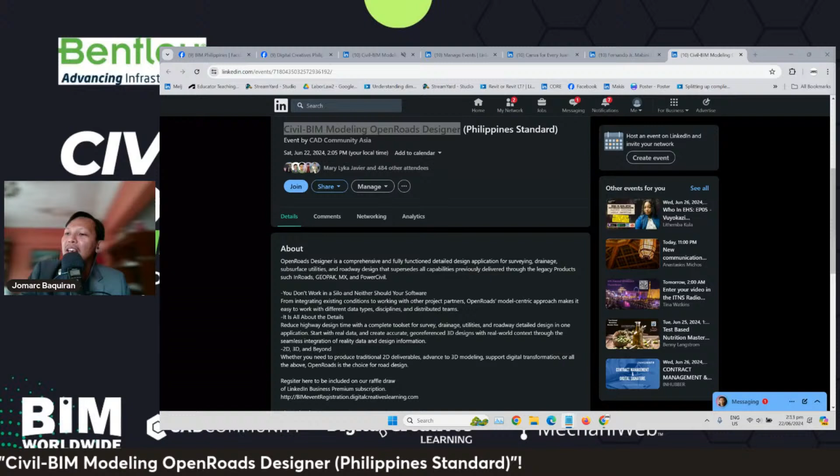Hello, thank you sir. Thank you. Hello everyone, for those who are joining virtually, thank you Sir Jomarc. Thank you for having me. We're live on Twitch, YouTube, LinkedIn, and Facebook.

So for those who are not familiar with Sir Fernando, he's also a Filipino, right? Correct, sir. I'm a native of Samar in the Philippines. And right now, where are you currently located, are you in Samar or somewhere else? I'm based in Singapore, and yeah, I was hired by a local company in 2008, and since then I'm already based in Singapore.

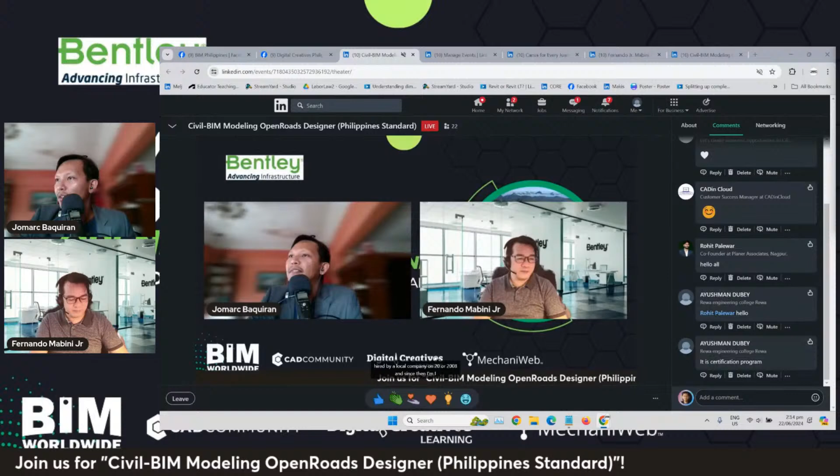Bentley, parang wrong spelling yun na. Bent, Bentley. Yeah. Yeah, to our friends who are tuning in from LinkedIn o sample o like Miss Nelsie o Bentley, Marlene Sally. Ayan. Sir Rohit Palewar. Thank you for joining us. Ayushman Dubey. Ayan. Worldwide tayo nga, sir. Tama nga.

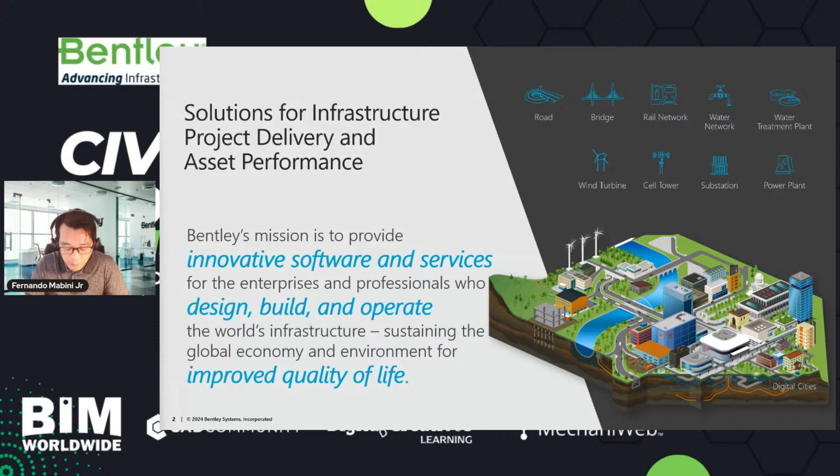But let's start with a little bit of history of BIM, especially in civil BIM. 30 years ago, our industry was living through the digital transformation of CAD, which was taking what we are doing on paper and moving that to the computer. And then there is the next disruption, which is basically from CAD to BIM, or building information modeling.

So now at this moment, our industry is advancing beyond that. We are basically moving from BIM, and for the last couple of years, we at Bentley Systems have been working hard at adding the missing dimensions, such as the dimension of time and the dimension of context. Okay, so let me dive into

Our purpose for today: our topic is about OpenRoads Designer, Philippines standard. So what's inside this standard? Basically, the Philippines data set is composed of different types of engineering principle. What consists of the Philippine standard is the CAD standards, the road standard details, and the design guideline criteria and standards, or DGCS, also known as the green book or blue book, or whatever you want to call it.

Okay, so let's take a look at the CAD standards. What is the CAD standards in the Philippine data set? That means we have CAD levels, or in Autodesk they call it layers, we have color tables, and we are going to standardize this. This is basically on the blessing of the DPWH.

The Philippine Geo Coordinate System is very, very important because we are working with a civil project, so Geo Coordinate System is very important. We have 5 zones in the Philippines, and 4 of them are actually the ones being used: zone number 1, 3, 4, and 5. Zone number 2 we basically don't use, it's in the Philippine Sea.

We have already line styles, lane markings, guardrails, road median, and barriers, and we have cell libraries as well, such as road signages or cell libraries, which include road signages, traffic lane markings, parapet walls, and monuments.

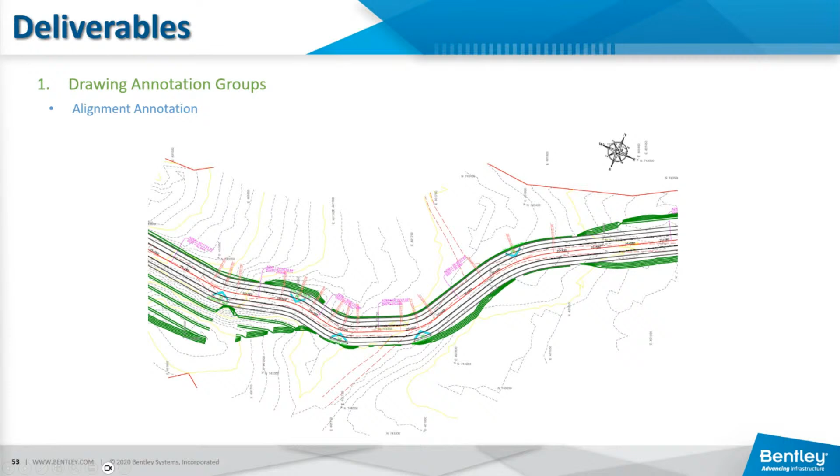In the drawing annotation, on the plan view, we call it annotation groups. We consolidate all those CAD standards and put them into annotation groups, and we apply them to every element you see here in the alignment annotations. Even those contour lines also have those CAD standards, and even the north symbol there is part of the CAD standard as a cell. For the long section profile, the CAD standard of the annotation group is also defined, and for the cross section annotations group it's also defined.

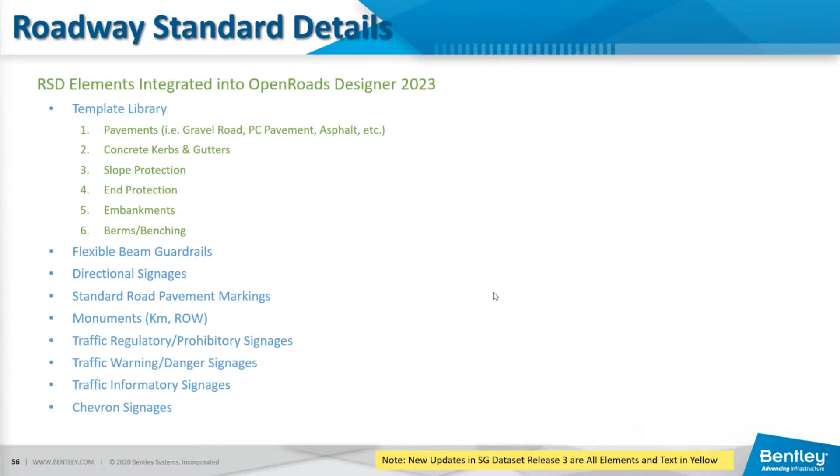Now let's take a look at the roadway standard details. What are those? Basically, those roadway standard details are composed of pavements, the road kerbs, the slope protection, guardrails, signages, pavement markings, the monuments, as mentioned earlier, the traffic regulatory or prohibitory signages, the warning signages, traffic informatory signages, and chevron signages. So those are the roadway standard details.

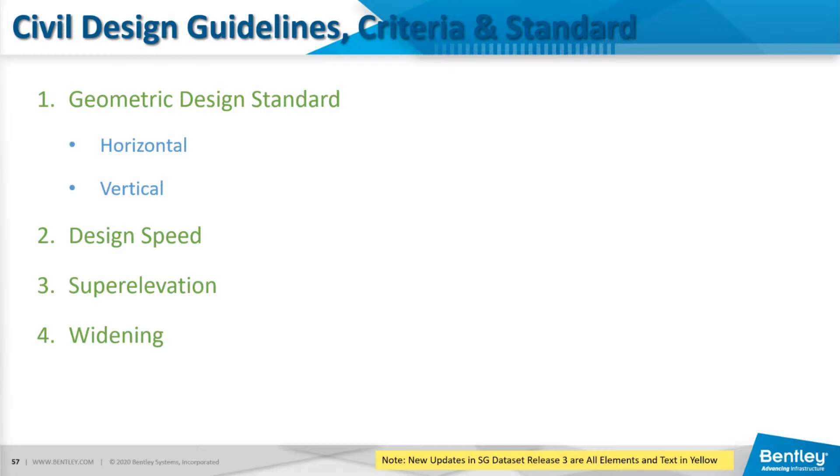And how about the DGCS? That's the engineering principle of the design, connected with the horizontal and vertical alignment. We apply a design speed into it, we apply a super elevation or road widening, so that when we create that in a model, we can determine the speed requirements of your road alignment.

Now what I'm going to show you is we're going to dive into a little bit of technicalities. We're going to create our project, and I'm going to show you the workflow of the project. Let me see here, what is the workflow of the project? Let me show you some slides. Okay, so there you go.

The advantage that OpenRoads has lies in the continuity of the workflow it has from the preliminary to the detailed design stage up to the project delivery, and this is regardless of the data deliverables your project may require. So that means we are going to start with collecting all the data, be it the reality model, the point cloud, or the TopoCAD files.

We are going to collect them. It is very necessary because we are basically creating a digital model, so after that we are going to convert them into a digital terrain model. And if there is geotechnical data, those bore logs or boreholes, we can use our GINT civil tools in OpenRoads to convert them into 3D models.

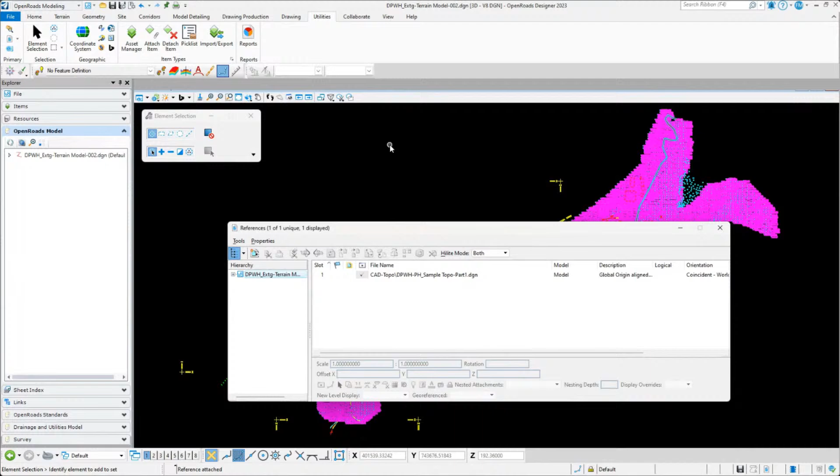For me to be able to create a digital terrain model. So what we have right now is a CAD topo. You can see here, you have those numbers, you have the COGO points right there, or topo points.

And if you rotate the file, you can see that it is basically not really perfect. But what we actually need is only those points right there. We need those points to be able for us to create our terrain model, so we don't need all those things right there in the bottom.

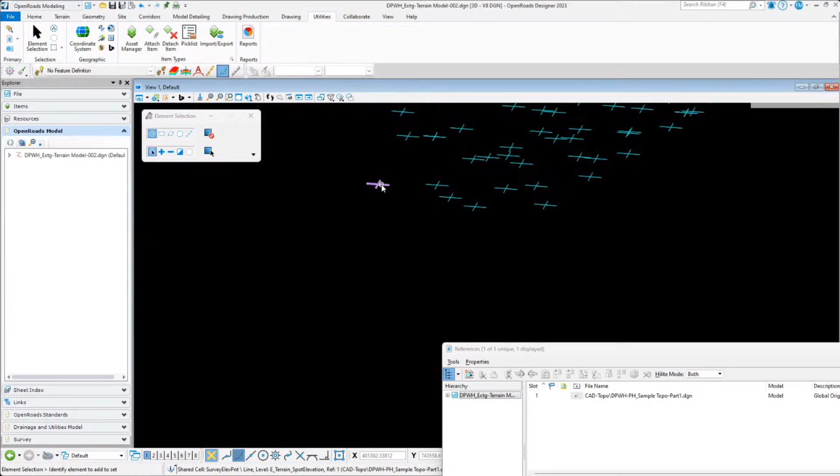So what we need is basically we need to confirm if these points right here are 3D. It has X, Y, Z value. So like so, you can see right here, it has an XYZ value. That means you have the elevation, right?

So what I'm going to do here, I'm going to turn off some elements that I don't need for me to create a terrain model. I'm going to turn off some displays, okay, such as this. So we don't need some elements right there in the bottom.

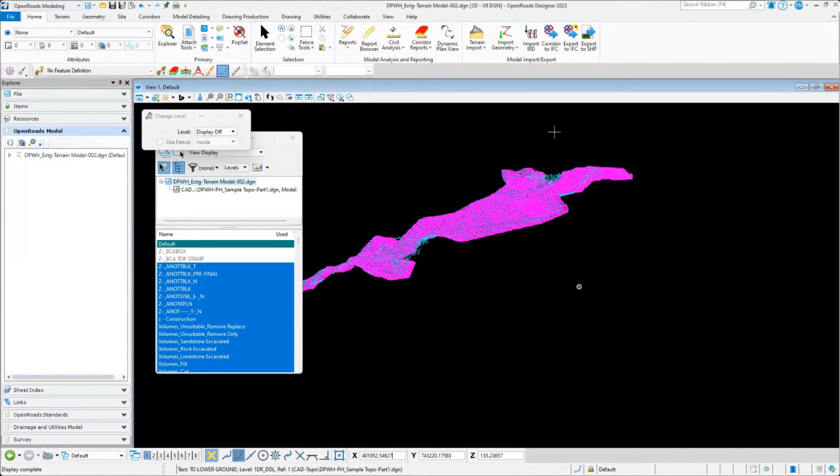So there you go. I don't need these fonts right there. What I need is only the survey points and those break lines that represent the existing roadway. So I'm going to select them all, and then use the terrain tools from the elements.

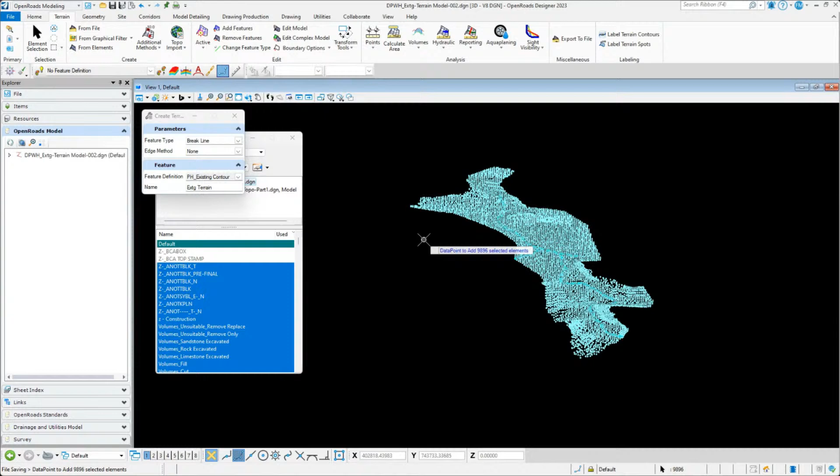I'm going to create a terrain from the elements I've selected. I'll use the Philippine existing contour, and for feature type, I'll go for a break line. Let's name this existing terrain. Left click to accept that, so it will create a terrain. Wait for that to be processed, it won't take a lot of time, maybe less than a minute. It will create you a terrain model.

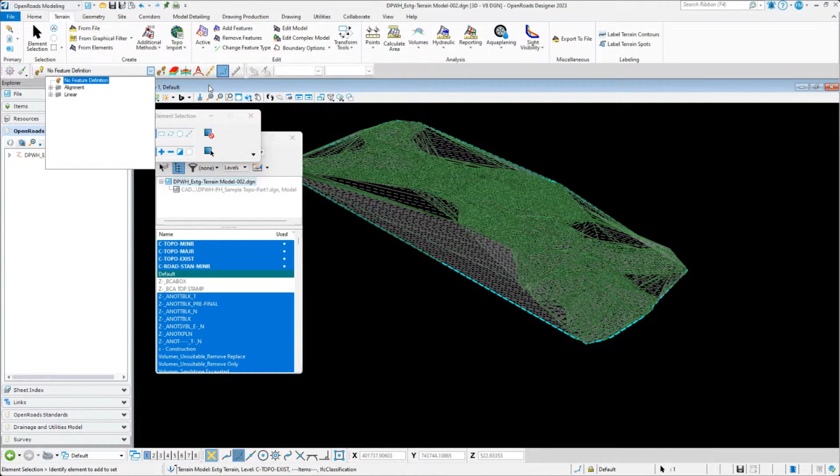All right, so there you go. Now let me just turn off my reference dialog box. So now you have your terrain already. If you take a look right here, let me change the property, open up the triangulations and change the display. I'm gonna change the display into a shaded view. All right, so my terrain is going to look like that.

So if you want to edit the terrain, remove all those triangulations that are not necessary. If you can see here, there are unnecessary triangulations on the edges or on the boundary of your terrain. You can use the edit model tool, select the terrain, and then delete all those triangles that you don't need. So there you go.

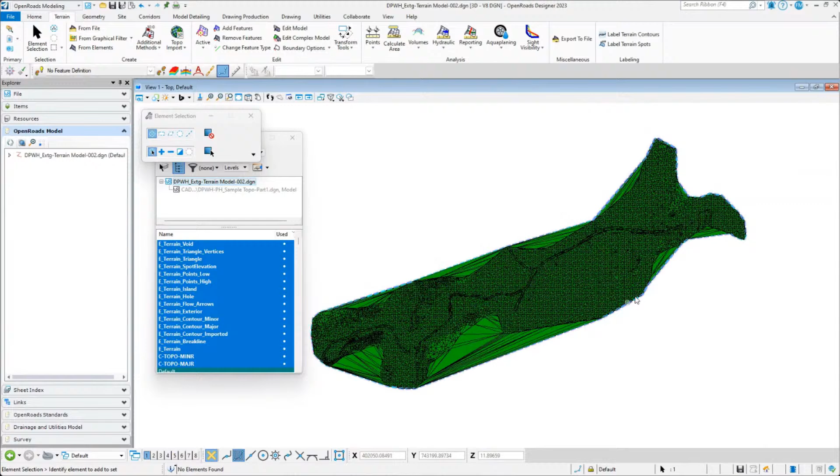So now after cleaning up your terrain, that is basically ready for your alignment creation or your road project creation. You notice that there's a road access right there, an old road maybe, a parent road, so we can be able to trace them and then create a new road using the break line that we selected earlier on.

You can see right here that I can use a feature definition, an alignment specifically for the Philippine standard. This feature definition will hold all those CAD standards, and it can be applied for a Philippine standard design. If you chose that and let it be activated, you can see here that I have the tool called Design Standard Toolbar.

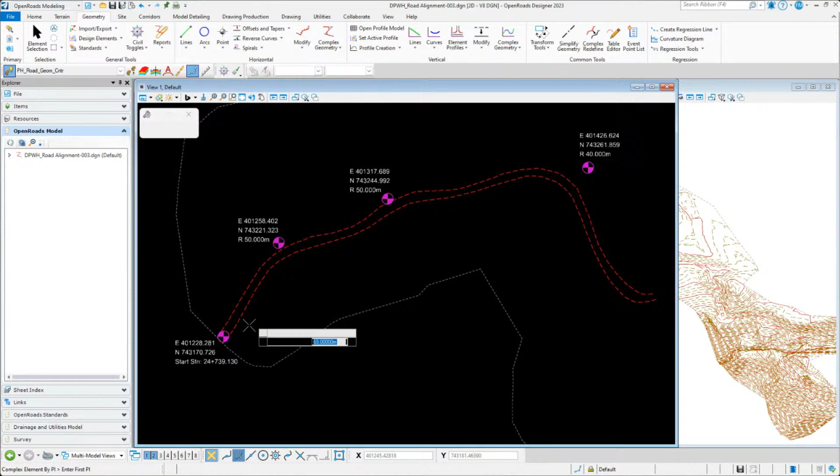So from here, let's say that the road is basically under 6% super elevation. You can choose this, let's say 4% super elevation. You can also choose the speed requirements of the road, but let's not use that for a moment. Let's take a look and create an alignment using all those setting out points that we have.

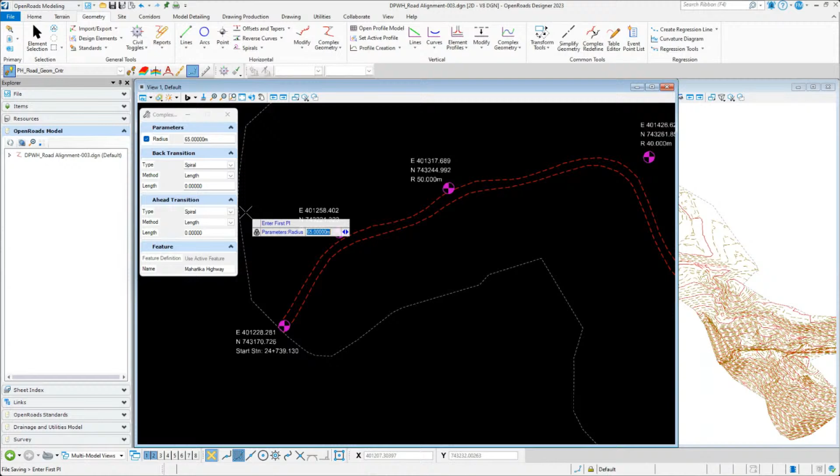Okay, so let's say, for example, this is Maharlika Highway. My radius at this moment is 65, but I can change that later on. So I'm going to pinpoint those setting out points right there.

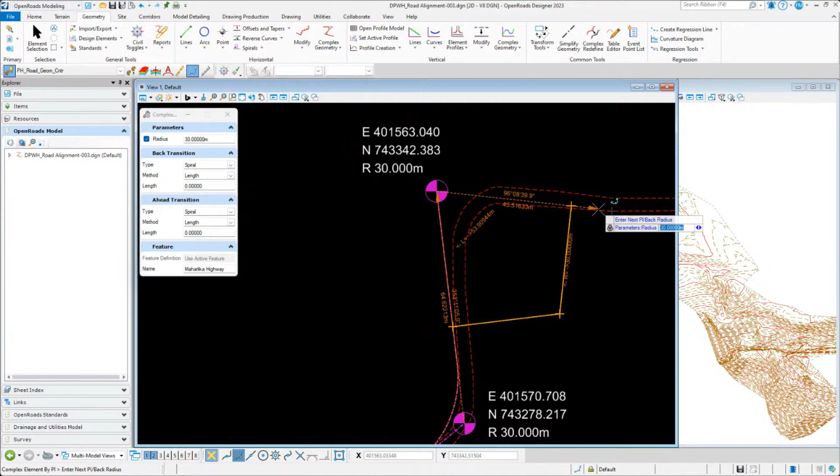So I'm going to change this according to the requirements. It says 50 meters radius, so I'll type that in. This one here is 50 meters radius as well. This one is 40 meters, so I'll just carry on through. This is 30 meters, that is 30 meters as well, 30 meters as well. So 45 meters, I'm gonna just type it in.

So I will just carry on following those parameters, 30 meters. Over here is 35 meters. And this one is 80, 120. Okay, so maybe we'll stop here. All right, so there you go.

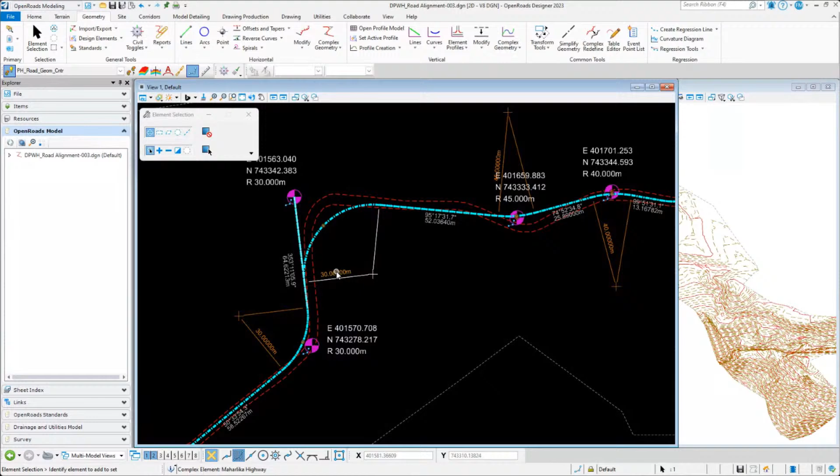Now let me see here, maybe 25, put it back to 30. So sometimes you stumble upon those kind of things. Okay, so now I have an alignment right there. So what I can do with this alignment, remember that this is a 2D environment. You'll see here, I'm in a 2D environment in Bentley Solutions, Civil Solutions. You are going to work in the 2D environment.

So I understand that this is 3D modeling, but this platform is a little bit different. Based on an engineering principle, we are working in the 2D environment.

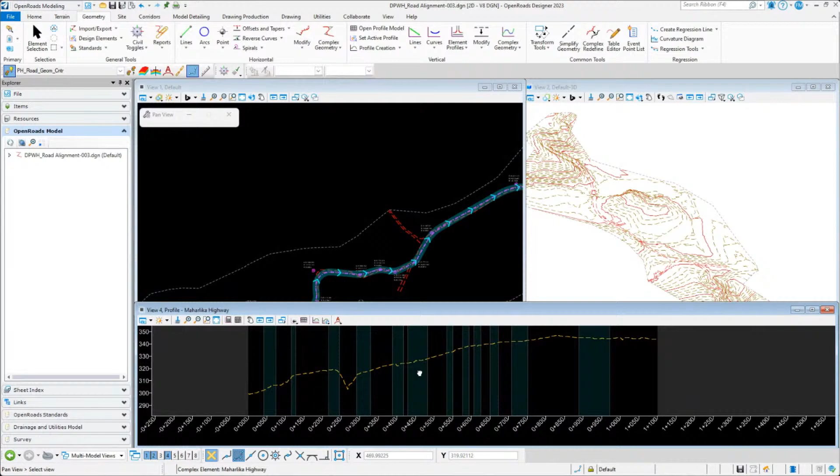After that, I can open up the reference profile, and then you can see I can create a vertical profile right there. I can exaggerate the vertical scale. Most of the time we exaggerate that vertical scale from the view attributes, maybe on a scale of 10 or so.

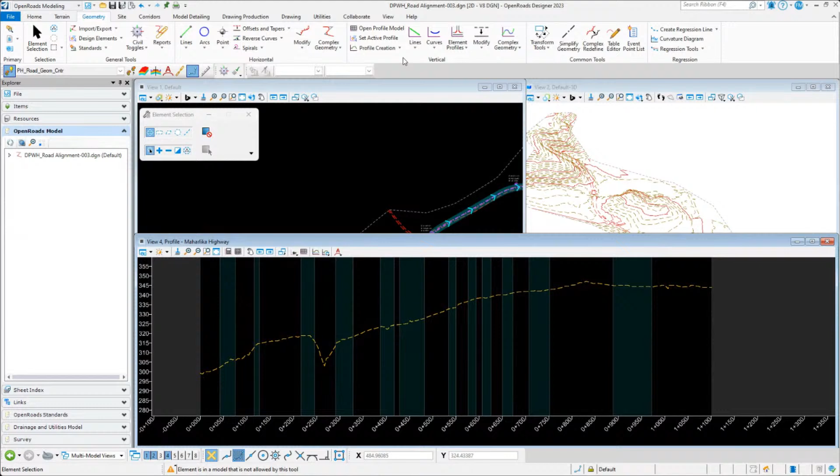Over here we have the vertical tools. We use those. We have different tools for horizontal on the plan view, and vertical tools on the profile view. That is very important.

Over here, I'm going to use the profile complex by VPI. I'm going to arbitrarily create an alignment, like so.

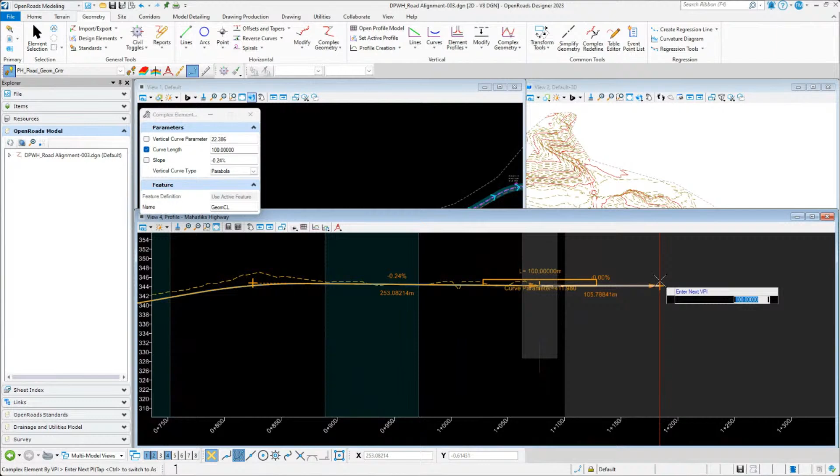So there you go, following through the profile that I already have. So now I have the vertical alignment.

Now watch, take a look right here. The moment I activate this alignment, it's going to create a vertical profile or a 3D model over here. You can see that 3D model of that alignment. That is the only way you can see it in your 3D preview.

Now you can see that all of these elements right here are composed of a Philippine standard, a Philippine CAD standard. When you use this PH road geometry center line, this is the color, the line weights, and the line style of the Philippine CAD standards for road alignment.

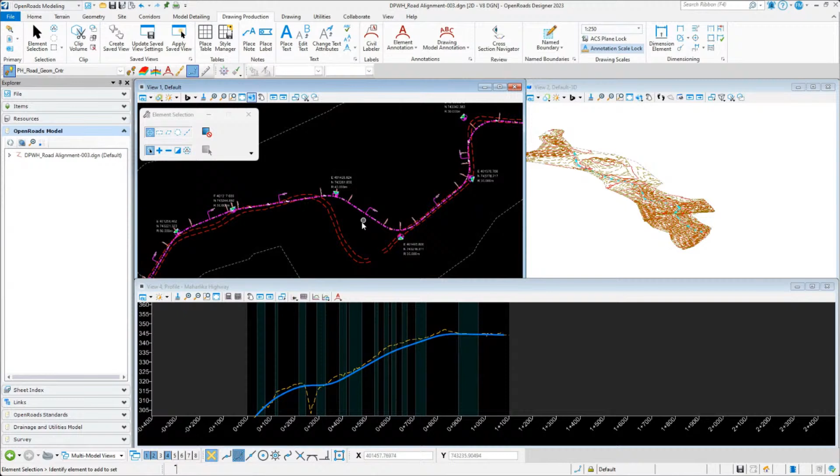Over here, I can place an annotation on that alignment. There you go, you can see all those annotations right there, also based in Philippine standards. Let me just turn off those dark fields.

It's the equivalent software of Autodesk Civil 3D, that is correct. Before, DPWH was using Civil 3D, but they shifted to more logical software such as OpenRoads, or the Bentley platform. So you might need to take note of that.

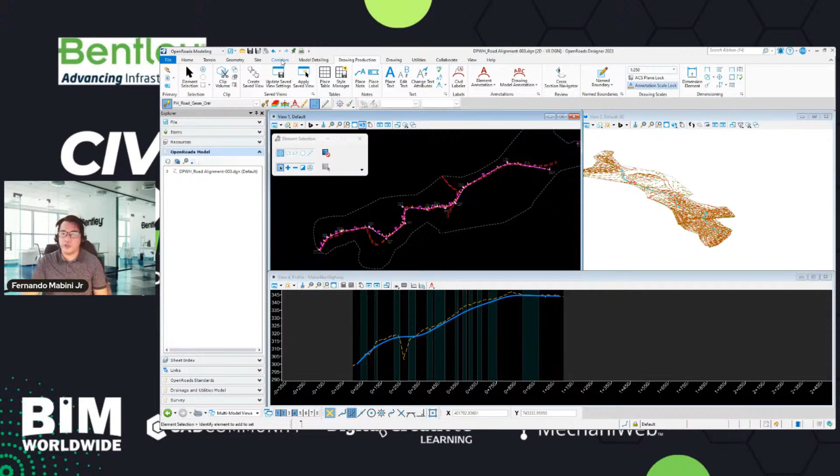Now I can use this alignment already because I already have the vertical profile. I can create a corridor out of that. You can see here I have the templates.

I cannot create a corridor without the template. You can see that I have multiple templates right here, basically based on DPWH projects. You can see here I have the ACP road embankment with berm.

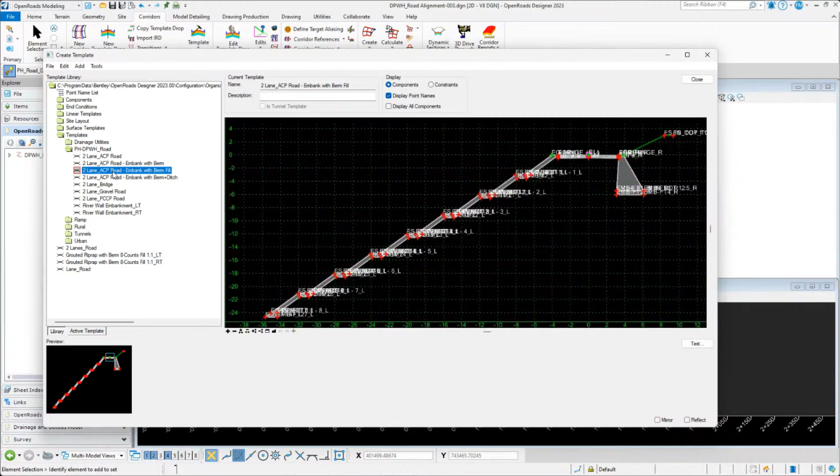Let me look here at the embankment with berm, because this is the most common. I'm going to test, or take a look at the behavior of this template. I'm going to click on test.

That means I can only see the pavement. Now, when the level of the terrain hits any of these elements right here, the berm and the embankment, you can take a look at what's going to happen.

I'm going to draw the level of the terrain. You can see right there, that is the representation of the terrain model, that white horizontal line.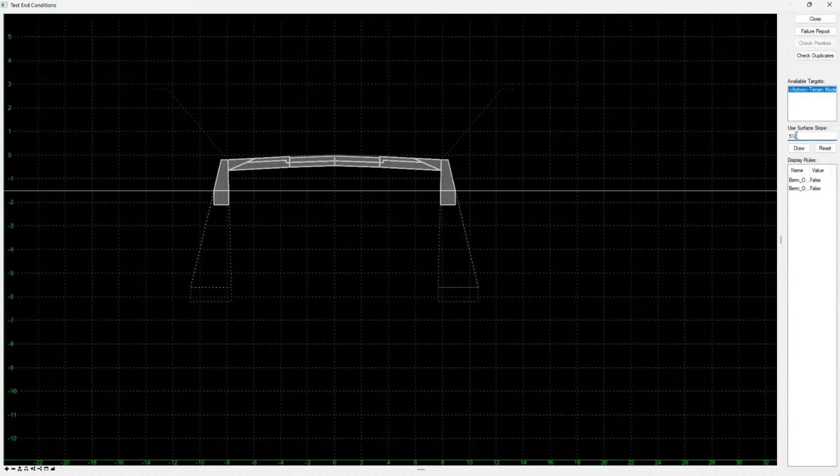Now when it hits below the grade line, it's creating a berm. You can see here, even if I change the gradient, or the degree of the angle, of this representation of the terrain model, you can see how it's going to happen.

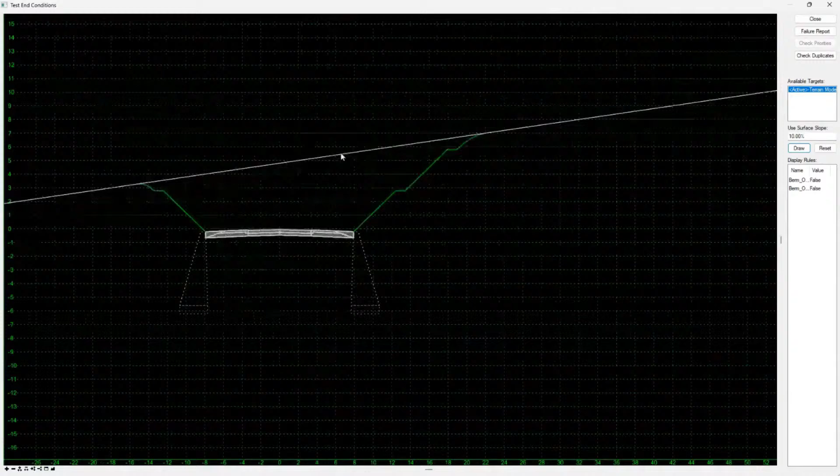Let me see here, maybe 10 percent. Let me draw that. All right, so you can see right there. So the other one right there is creating a cut grading, and the other one here is creating a fill grading. So that is the behavior of the template.

Let me use this two-lane ACP, or asphalt concrete pavement, road embankment with berm. Use this one as well if you want. So let's take a look first at the behavior of this. Right, so there you go.

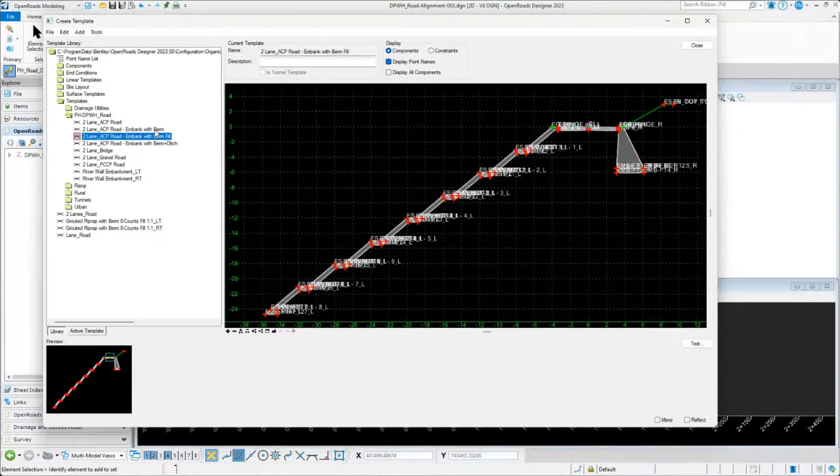Okay, so the other one is benching, embankment with benching, and then the other one right there is berm. And when it hits the grading right there, it creates an embankment cut section. So those are the example of the behavior when you're using Bentley or OpenRoads application. All of this in the list of the template library is based on Philippine dataset.

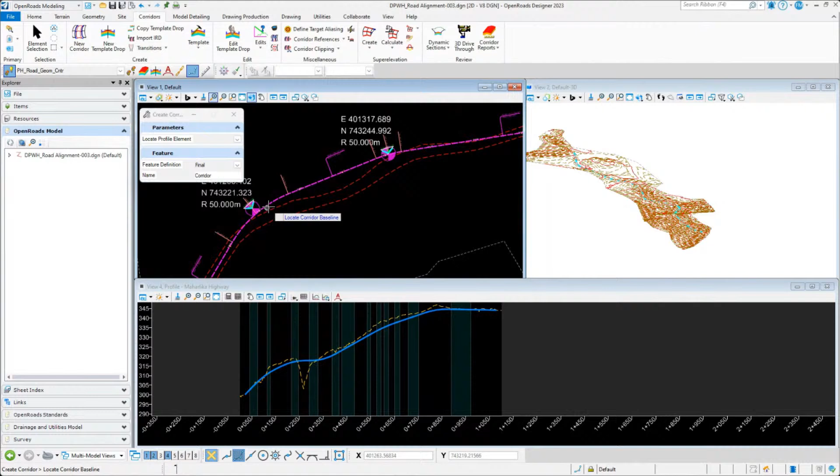Okay, let's use this two-lane ACP or asphalt concrete pavement road embankment with berm. I'm gonna close that and use this corridor tool. I'm gonna select this alignment. I'm gonna name this Maharlika Highway, left click to accept that naming convention. And then I'm going to look for my Philippine dataset library.

As I mentioned, I'm going to use this two-lane ACP road embankment with berm. Let me see here, this one. I think this one is much better. Let's use this. So I'm going to lock to the start, left click to accept that, and I'm going to lock to the end, accept. Drop interval is 3.

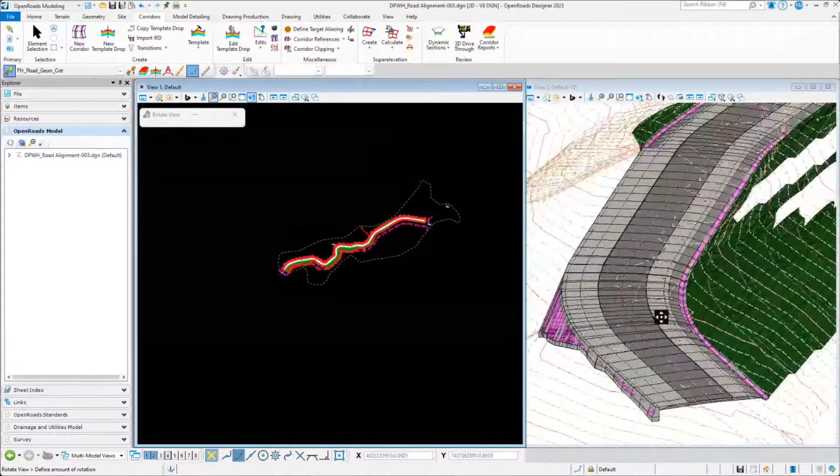So take a look right here in the 3D preview, what is going to happen. All right, so there you go. It created me a road project immediately with a berm and on the side with a cut grading with a benching. So right there I have those berms.

And the road is the asphalt concrete pavement based on the Philippine dataset. All right, so there you go. That is how you can be able to create your road project.

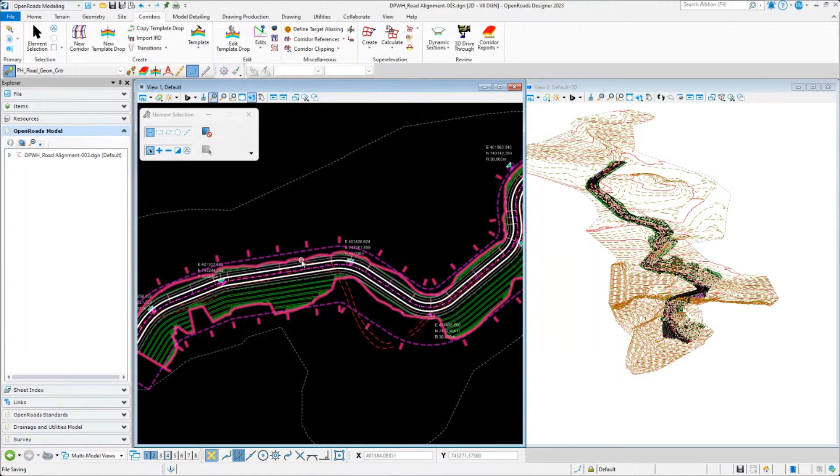So over here at the 2D model, it's also created. So keep in mind that there are two views here, the 2D and 3D views. And most of the time, 99.9% of the time, we are working on the 2D environment. So notice that I work on the 2D environment, both horizontal and vertical, and it created me a 3D model.

Okay, so that is how it basically works here. So now, all right, let's go back right here in the geometry tab. What we have is basically, as I mentioned earlier on, I can be able to create, let me see here, maybe in this area right here I will create parapet walls.

If you are familiar with traveling along the Maharlika Highway, you can see all those parapet walls. So I can create or I can choose those parapet walls over here. Maybe this 1.5 by 50 by 50 by 50 3D parapet wall. I'm going to use that and use the placement mode along. I'm going to use this area right here, start method, stop, and then the spacing is interval.

Okay, so maybe I will go to the drawing production, and there you go. So interval, maybe this one here is 1.5. That's gonna be... hold on, I'm looking at maybe 2 meters. Let's see here, 2 meters of interval. I'm gonna start right there.

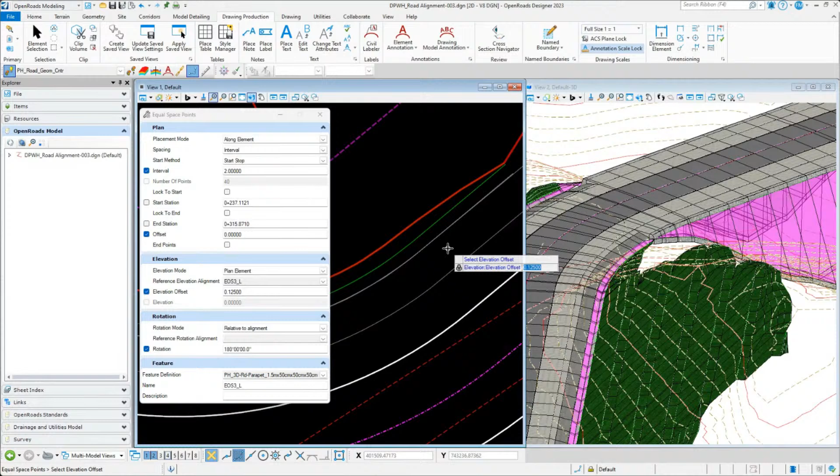Okay, so you can see that parapet walls right there, that is creating. So I'm going to place it maybe until this point. Right, offset is basically, let's say 0. And then elevation plan is this area right here, elevation offset, just 0.125. And then reference point right there, rotation is basically 180.

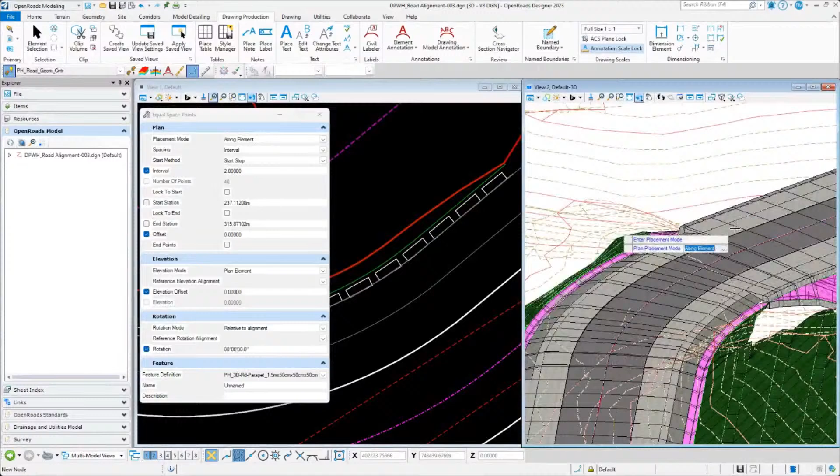All right, so there you go. So over here in the 3D view, if you take a look right there... oops, let me see, let me take a look right there on the rotation value. Sorry, in the elevation value. Right, so there you go. So it seems like

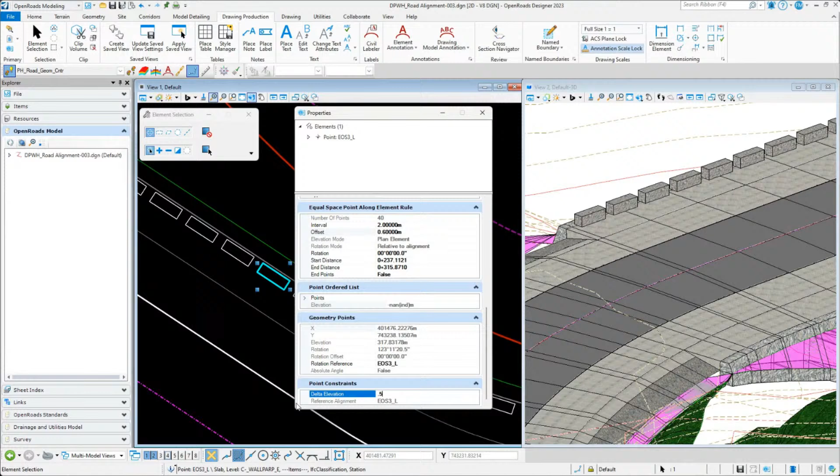my elevation is a little bit offset value. That's maybe point 0.6 offset. Elevation mode, plan element. Yeah, there you go. Maybe that's gonna be point 0.5. Okay, point 0.5. All right, so there you go. So now you have your parapet, and then you have your 2D parapet, and then you have your 3D parapet. So basically, it's very easy to create your parapet wall.

So let's say, for example, I'm going to create my vehicular guardrail. So vehicular guardrail, I can use this offset and tapers, single offset partial.

So I'm going to use the align feature under linear, and then under guardrail and barrier, I can select the left side guardrail single. I can use any of the available lines, so let's say this line. I'm creating a guardrail at an offset value of 0 from that line, starting right there, all the way to just touching the parapet walls. So you can see basically how those parapet walls have been created.

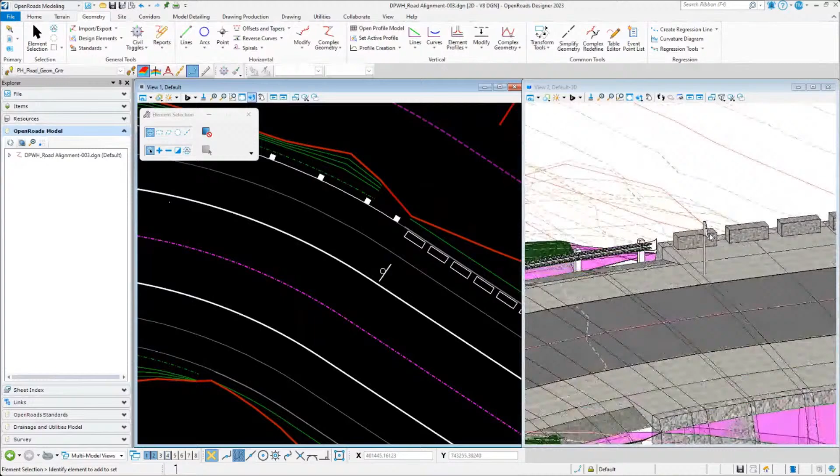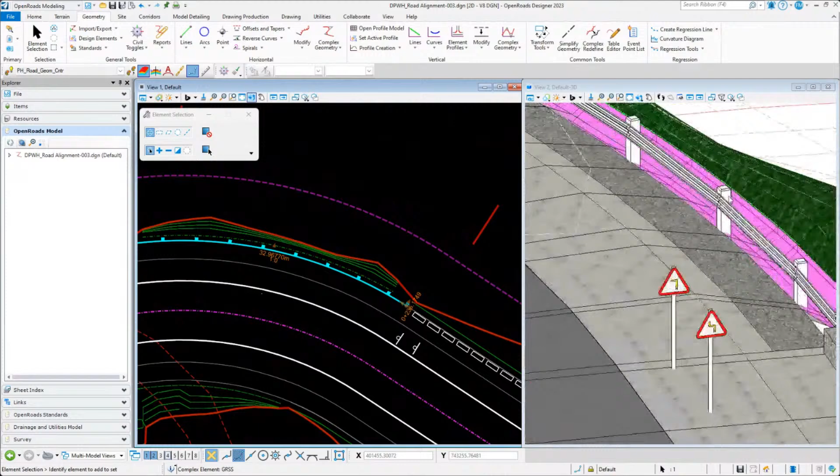Okay, let's do it again, maybe another one, this one. So there you go. You have the 2D and then the 3D symbology. That's how OpenRoads is basically operating, like for example the vehicular guardrail here. You have a different symbology on the 2D view for the drawing representation, and a different symbology on the 3D view.

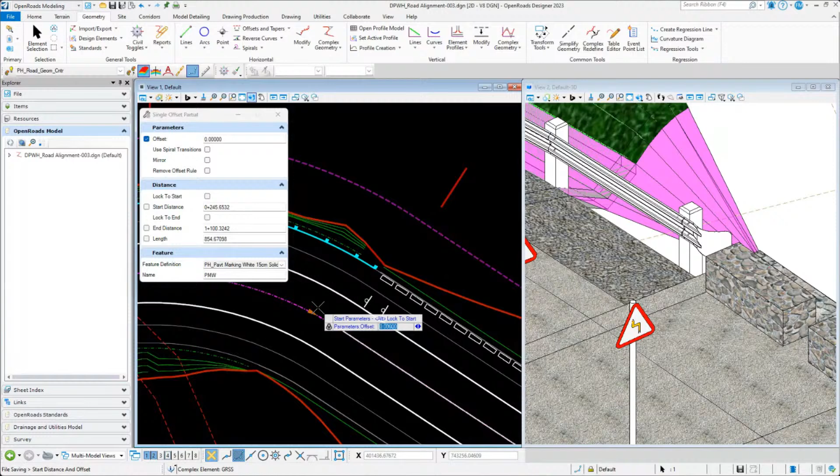So how about if we place or create a lane marking? We use this lane marking, the PH pavement markings, maybe the 10 centimeter solid or the 15 centimeter solid. Let's use this one and take a look right there in the middle of the road. Let's position our camera view so we can see it.

So there you go, maybe we start right there, just for example. So there you go, I can immediately create our lane marking. Let's do it again, maybe the yellow one, 150 yellow pavement marking. Maybe on this 3.5 value, or 1.5, just for us to see it. Okay, so there you go.

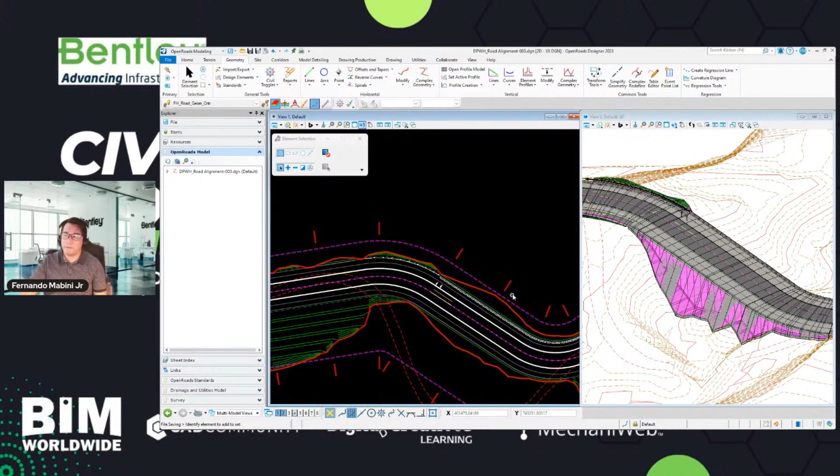This is how easy it is to model highways such as Maharlika Highway in OpenRoads model, right? So after this, you've already placed your road markings, you've already placed your parapet walls, so all you need to do is basically compose them all together.

So I have this data here to compose them all together. You can see here I have a little bit of bridge, embankment, the wall of the bridge, or end wall and approach wall, and then those parapet walls. I've clipped out the portion of this terrain model. This is an example of the finished product. I have all those junctions or interchanges created as well.

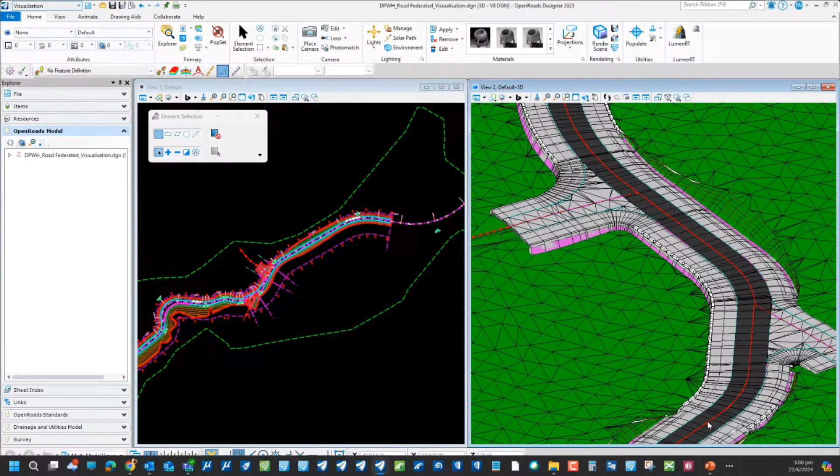So all you need to do after that is go to the workflow and change it to visualization. And over here we have the rendering tools, or a visualization tool called LumenRT. So you click on that, and it will let you process the model. So what it looks like after processing the model looks like this.

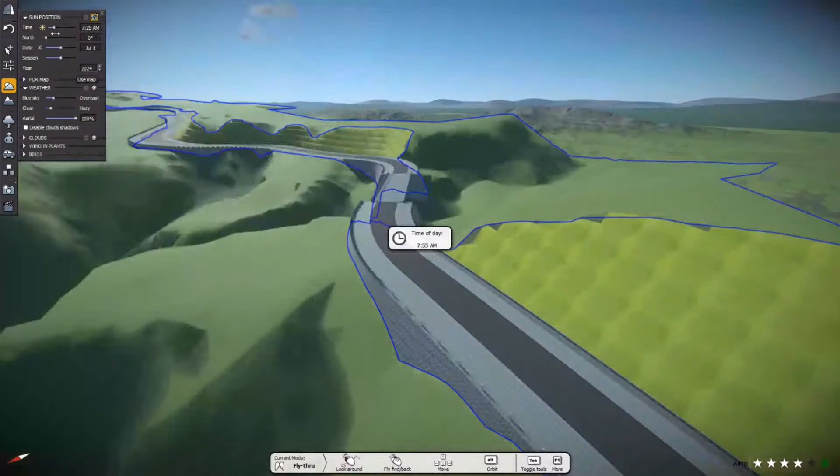So right here you can see an example of a ready-to-render model. I have already placed the grassland of those terrain and embankment. You can change or adjust the quality of the render, and you can see here that I can change the environment, the weather, the blue sky, I can create the blue sky, I can change the time. Basically, this platform will help you render your model better.

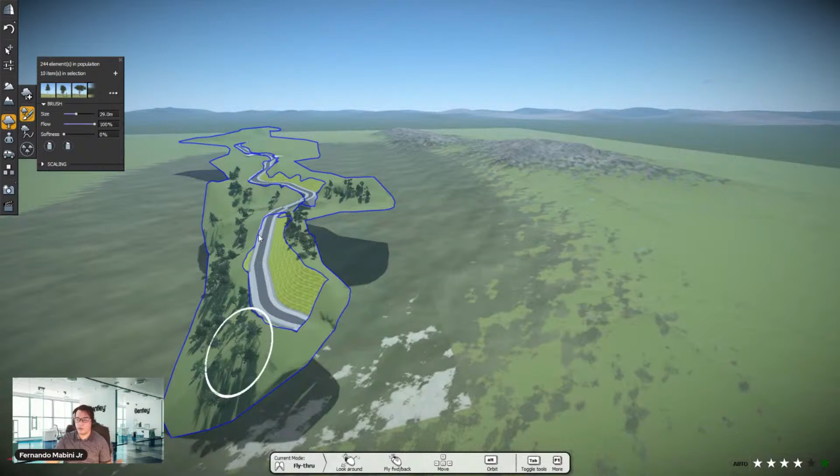So maybe I will place some trees right there, just give me a time, this won't take a lot of time. Over here I can place vegetation, that easy. So there you go, I can increase the size of my brush so that I can easily place those vegetations right there. Like so. Let me just put on some more.

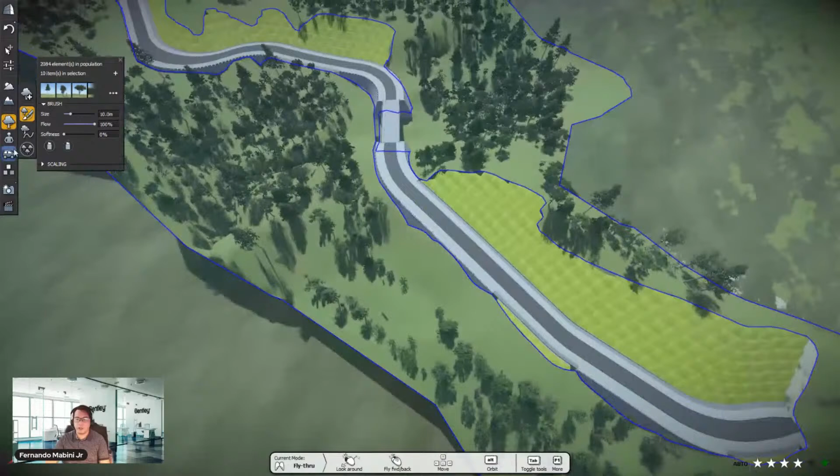Okay, so after that, maybe I can put on some more over here, and some more right there. So after that, basically you can place some vehicles. If you want, you can create moving traffic by choosing populate along spine or populate inside an area. Most of the time I'm using this populate along spine.

I can create a fixed distance, maybe from here to here, but over here I can also use this create a traffic. I can add up the density of the vehicle along that direction, and change the minimum speed and maximum speed. If it's a two-way lane, maybe I'll just say one lane only, and the width of the lane maybe 3.5, that's going to be okay.

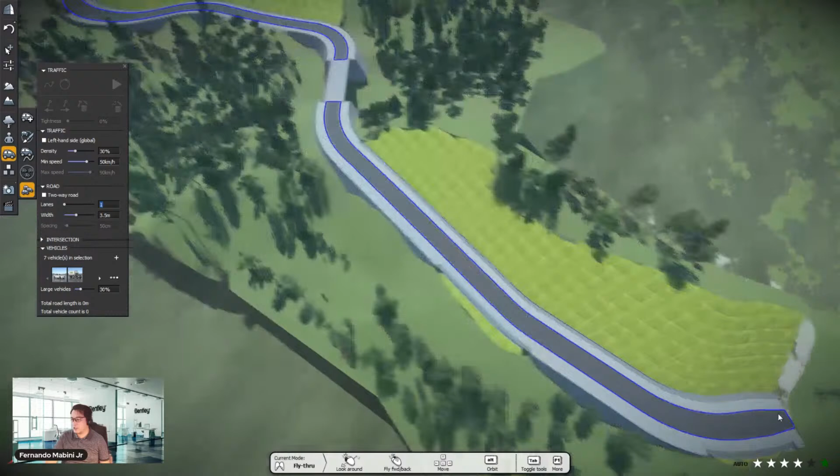So now I can place my traffic from here. Let me see here, I'm going to use that arrow right there to basically create a traffic. Maybe I'll just stop right there, and then press the play button. Okay, I don't know why there's a rail MRT here, so let me just delete that.

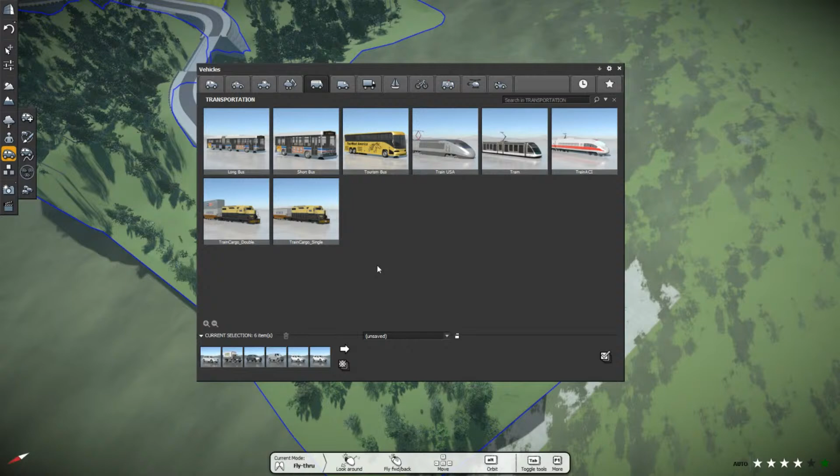Let me undo from the selection. Let me just take a look at my selection, so you can see, oh, because I have that one right there. So let me go right here and uncheck that as part of the selection. Let me just go over here to trucks.

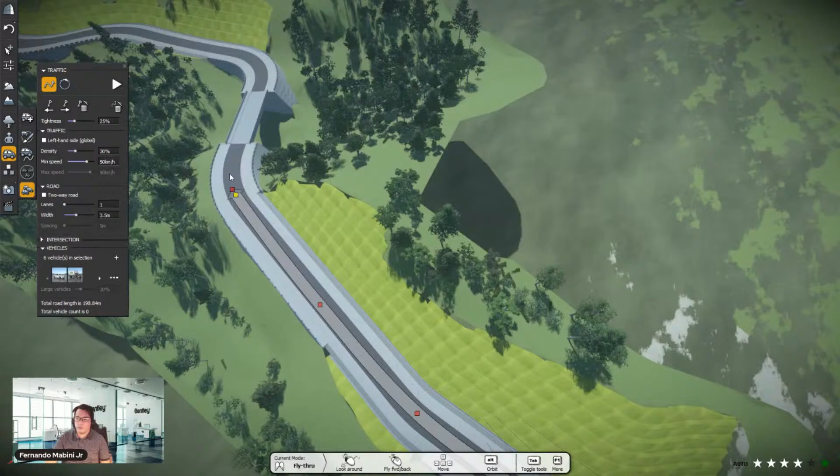All right, so anyway, I'm going to start again. So maybe from here, okay, so all the way through. Maybe let's go beyond that bridge, and then hit the play button here and take a look what it's going to happen.

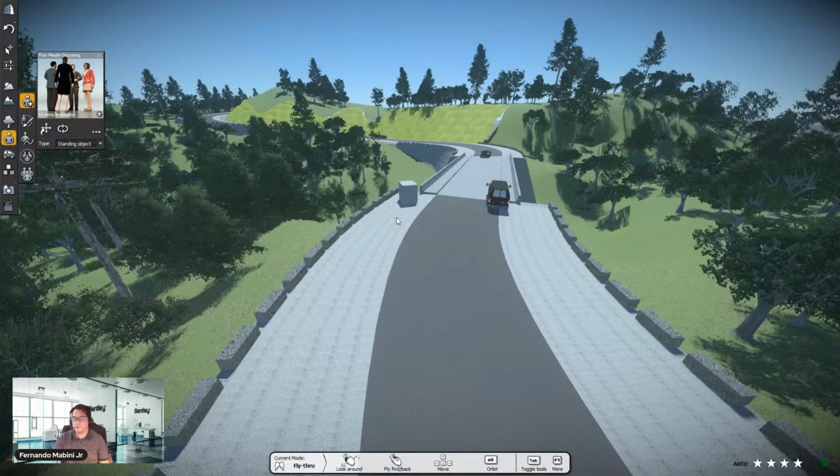Like so. All right, you can place some people. Let's say, for example, there are people right here, basically on the side of the road. I can use this right there. Let me see here. All right, so there you go. Maybe let's go farther from the road. I can create moving people, something like this lady right here.

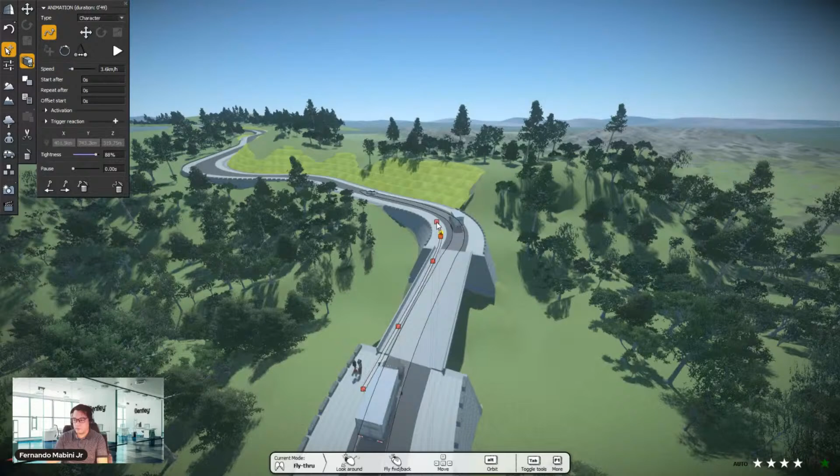Okay, maybe I will change her direction. Okay, so there you go. And now, when you take a look right there, basically it lets you create a realistic real world scenario of your project.

Okay, so say for example you want to turn on the water level, so you can see that there's a water level right there because you have the bridge. So maybe we might as well have that water. Okay, so there you go. All right, so basically that is the Open Roads Designer, and this time we are using the Philippine data set. All right, so any questions from everyone? And otherwise, back to you, Sir Jomarc.

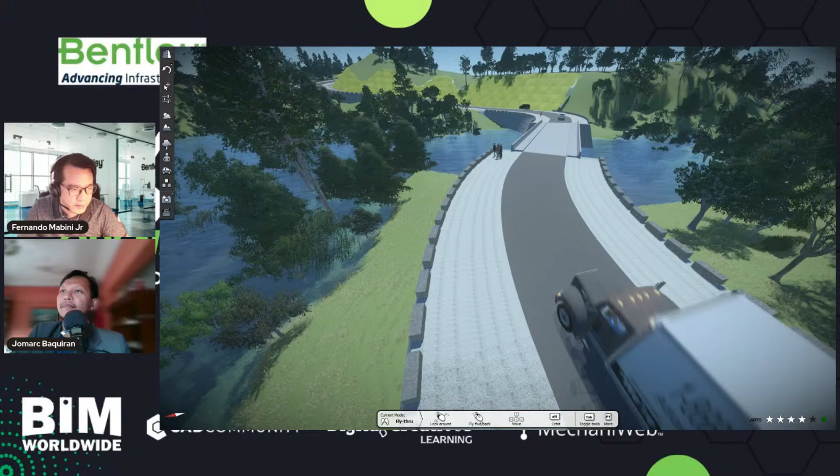Sir Aaron asks, how about placing of the street lights, is the workflow the same? The question, you are correct, the workflow is the same for placing the street lights, same as placing of the signages or the street lights or the traffic lights. I hope that answers your question.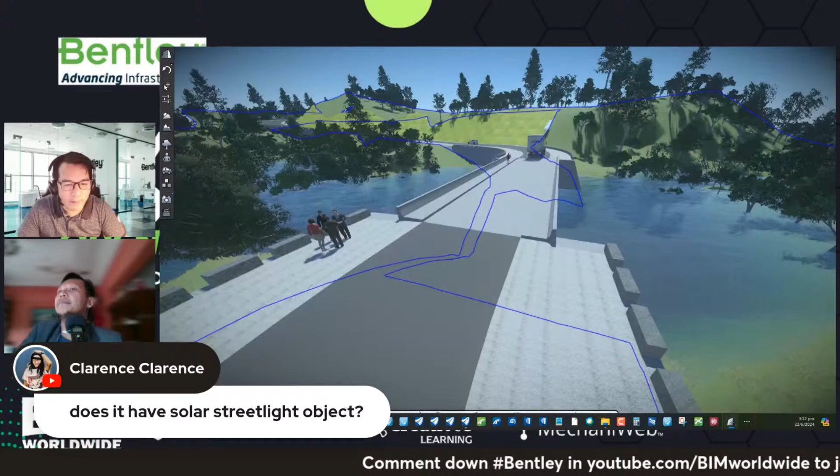So we have a question from Ma'am Clarence: does it have a solar streetlight object? At the moment, we don't have a solar streetlight, but you can easily create one yourself. For example, our vendors for the streetlight have ready-made CAD files for you to use, and the data set we have is customizable. It's not a hardwired setup, so it's customizable for you to create project-specific libraries. I hope that answers Ma'am Clarence.

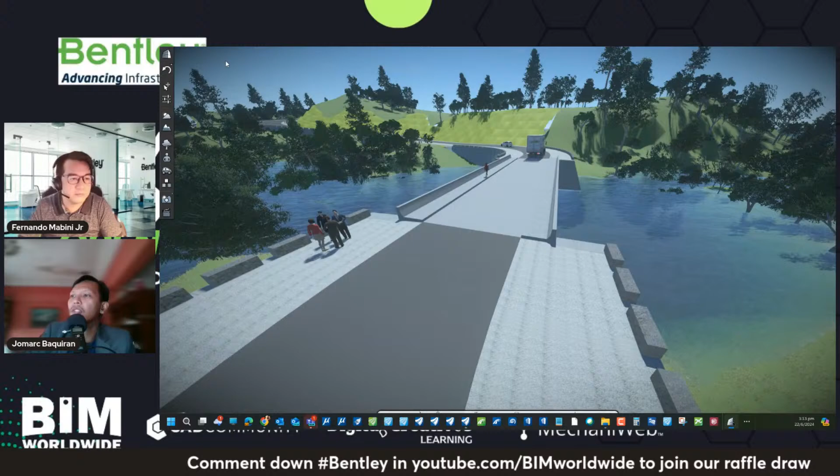So once more to our viewers, Sir Fernando is based in Singapore, so definitely he has a bird's eye view of the status of the Philippines in comparison with our ASEAN neighbors. What's your take on that, Sir Fernando? Are we so far left behind? Are we advanced, or what's the status of the Philippines?

The answer is yes and no, sir. In terms of the skill set in the Philippines, our Filipino talents are really on the advanced stage. The BIM modelers in the Philippines, be it building or civil modeling or any kind of BIM modeling, we are already advanced. But on the BIM management point of view, we are basically far behind because even at the institutional level, we are still not there yet. We don't have the BIM standard. There is nothing you can download from the government site for the BIM standard. We don't even have the BEP or the building BIM guides.

What's the status with Bentley? Is Bentley helping craft that law or that RA with the government? Are you coordinating with the government nowadays, or not so far? Sir, we don't, and I think the vendor should not be involved in that kind of crafting. We can put in some inputs, or serve as a resource of information, but in terms of crafting those kind of constitutional documents, we don't have anything to do with that.

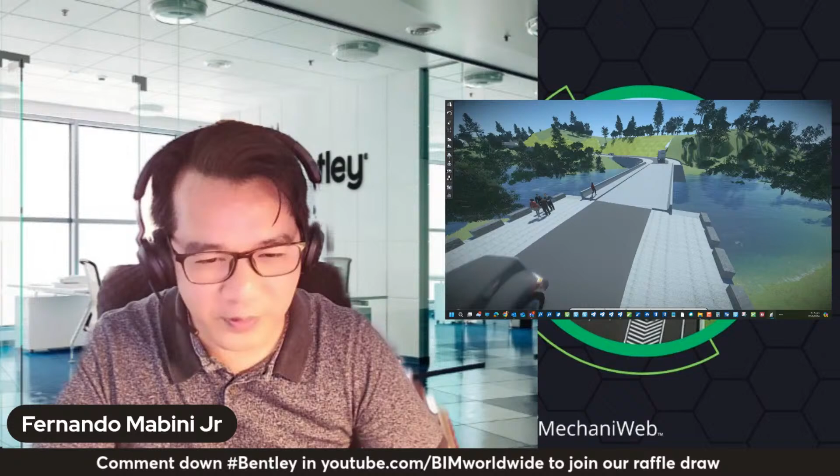So we have a question from Sir Aaron: will preparation of construction drawing documentation be tackled in this session? Do we still have time, sir? Yes, absolutely. So basically I focused on modeling only. Can we customize parts in OpenRoads? The question is yes. All right, so let me go back.

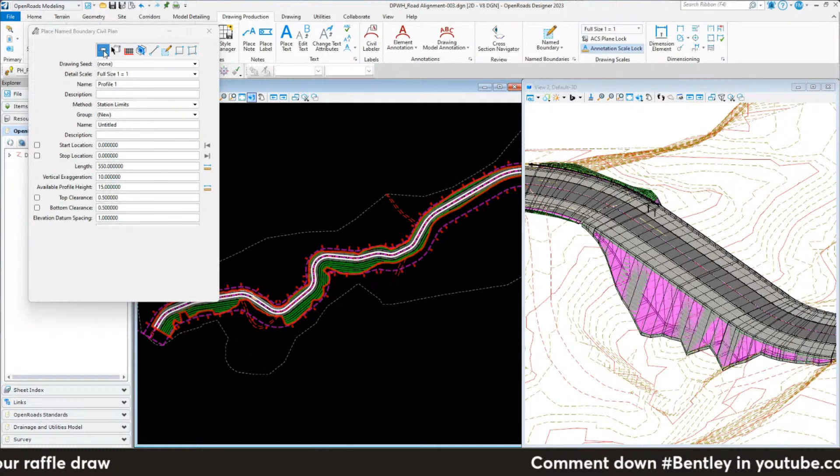Okay, over here let's say for example I go and create a drawing. Basically the drawing production in OpenRoads is very, very relatively fast. Let's use this plan here, and create a drawing. The boundary chords is at 0 right there, overlapping - I might change that. You can see it's creating a rectangle object, representing your drawing paper. Let me just change the overlap right there. I'm going to carry on with that, create the drawing, and say yes, create my drawing. You can see it didn't take 5 seconds for me to create the drawing - so there you go, I already have this drawing created.

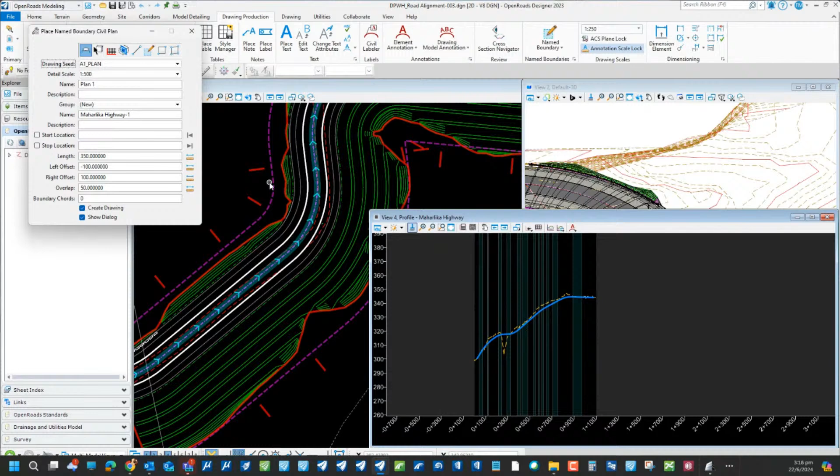Okay, very fast. Let me go back to my drawing and open up my profile right here. So what I'm going to do here is create a vertical profile, using this frame profile with frame annotation.

I missed creating the super elevation, but we can create one very fast here. Let me move on, and you can see I can basically create a profile drawing at a very fast pace. Let me just wait a while.

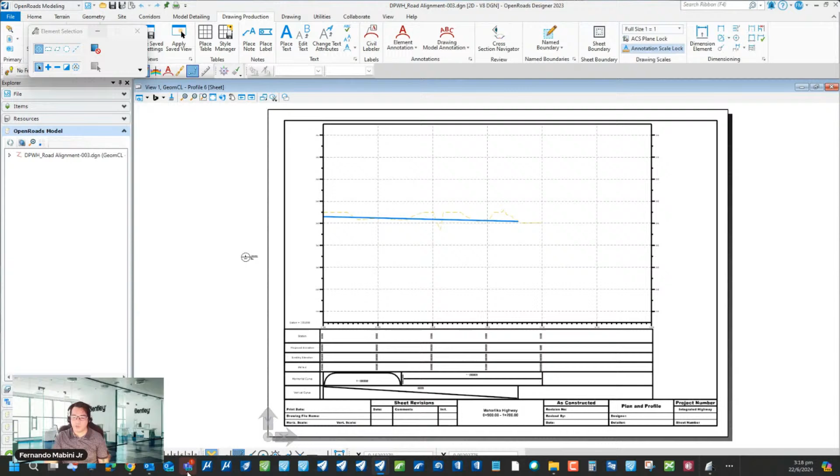There you go, now you have your vertical drawings. So there you go, profile number 6, something like that. I hope that answers the question, Sir Aaron.

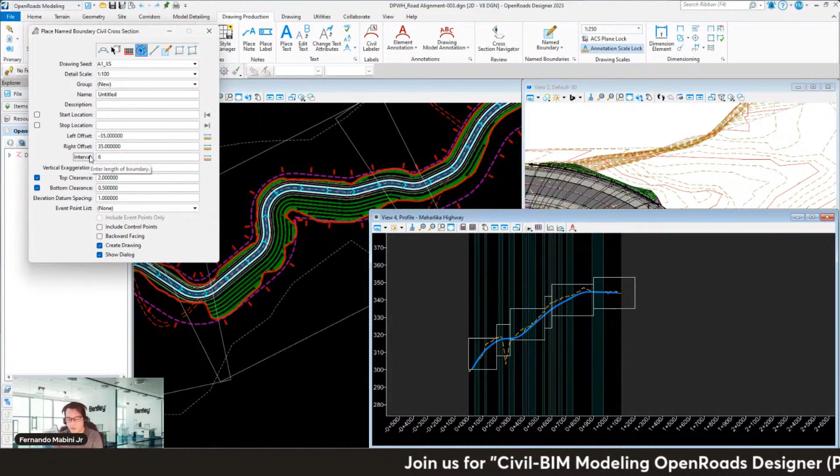Let me just go one more here. I'm going to give you maybe just a normal cross section, an interval of every 60. It's going to create a cross section, but of course you can still create cross sections according to your liking.

I'm going to start right from there, all the way through, to create a cross section. I'll say yes, create my cross section. I need it in one minute.

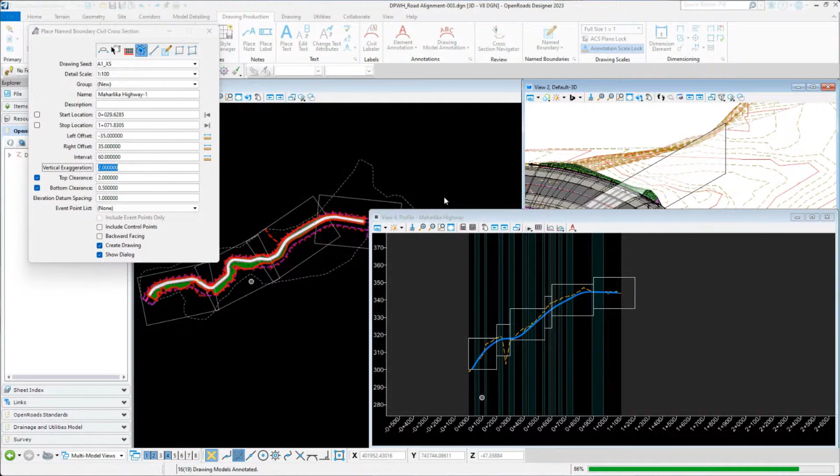So there you go, you have your cross section drawings. Very fast and effective. Last time, creating a drawing for this kind of model would take maybe one or two weeks. But now it didn't even last five minutes. I already have plan view drawings, profile drawings, and cross section drawings.

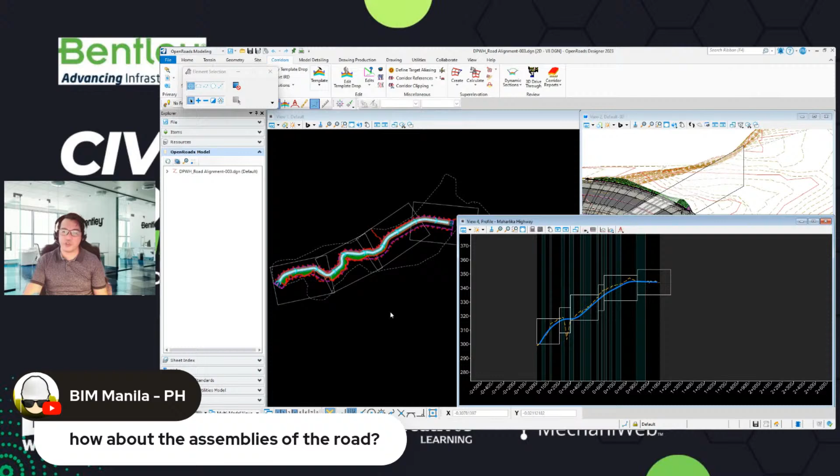How about the assemblies of the road, BIM Manila asks? The assemblies of the road are basically according to our templates, which I already showed you earlier. In this template, we usually use these components right here.

On the components right here, we have curbs, those are the components. We have ditches, we have the pavements. What we do is basically combine them together to create the model, so we don't need to create one by one. Even though you can create one by one, a simple constraint pavement, something like that, we can basically create those kinds of components.

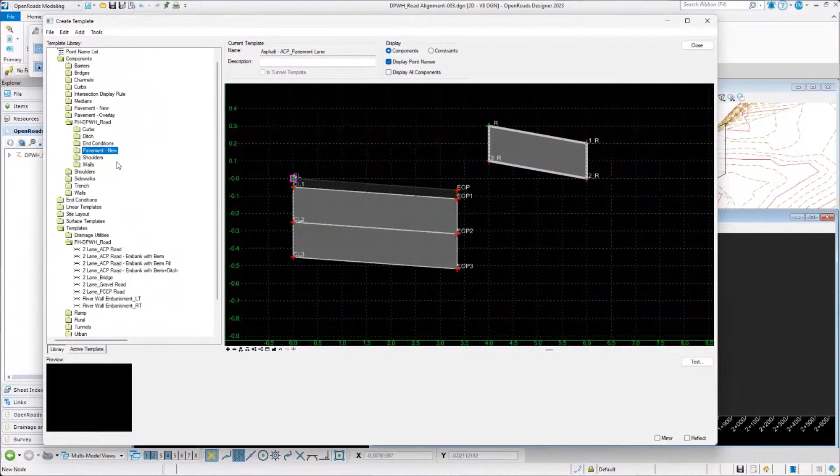But basically for the Philippine dataset, you already have all the things that you need. All you need to do is combine them together to be able to create your road model, something like this, or something like that, right? So it's very, very convenient.

Yeah, okay. All right, so yeah, sir, back to you.